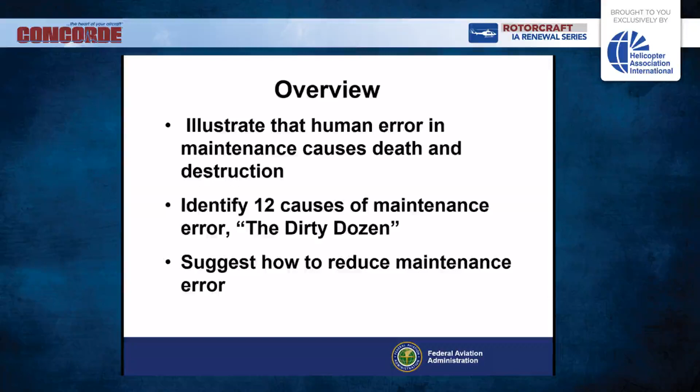This means everyone will make a mistake sooner or later. In fact, the best people often make the worst mistakes. When learning of an accident caused by human error, it's common to think the person involved is somehow deficient in skill or character, while we, on the other hand, are well-meaning, motivated, experienced technicians. We just wouldn't do something that stupid. When we think in these terms, we discount the moral of the story and miss the lesson of it.

So here's the lesson. Does the Air Force select mediocre pilots for the Thunderbird demonstration team? Not likely. They choose only the best of the best. The reason that the best people make the worst mistakes is they are assigned to the riskiest job.

The point is, you can be the sharpest person on your crew, but if you have a sleepless night or someone doesn't give you vital information, you might make a mistake. We're going to give you some suggested safety nets as we go through the presentation to help prevent these things from happening to you.

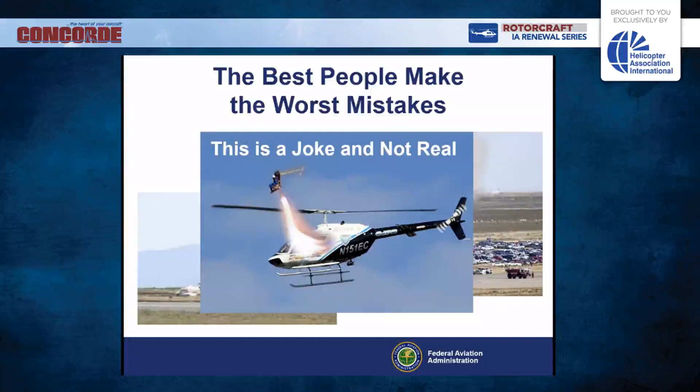Okay, we're going to go to a video here and show you about pre-flight after heavy helicopter maintenance. Welcome to this installment of the FAA's Rotorcraft Collective Series. We've been taught from day one that a safe flight is preceded by a comprehensive pre-flight inspection. Do you know where to concentrate your efforts on a pre-flight after maintenance? Let's cover a few good practices for your next pre-flight, stressing after maintenance items.

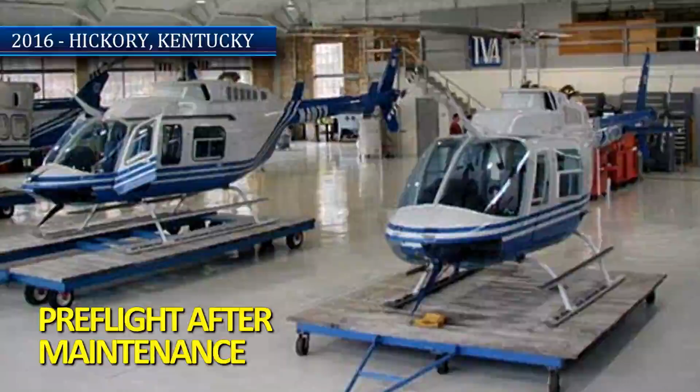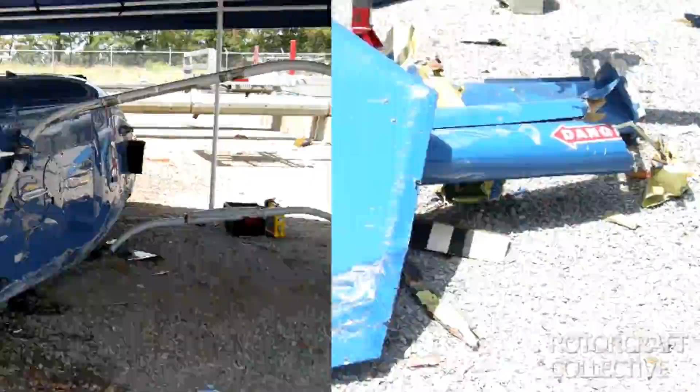Summer 2016. A pilot from the Tennessee Valley Authority was killed in a Bell 407 on a flight to Hickory, Kentucky. During a routine landing at about 75 feet, the helicopter suddenly went sideways, rolled, and hit the ground on its right side. Investigators found the collective lever disconnected from the pivot sleeve, and its attaching hardware was found in the wreckage near the main rotor hub.

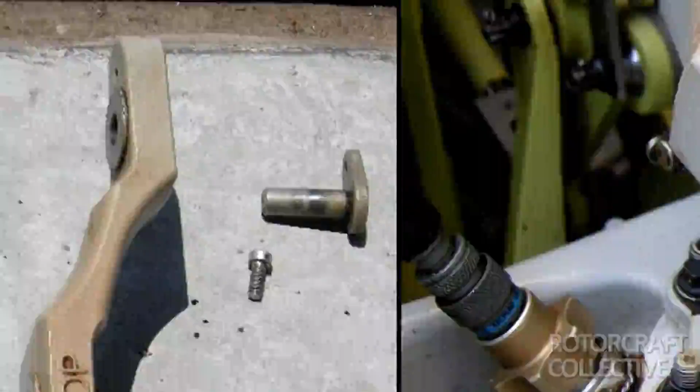The collective lever had not been safety wired, allowing the screws to work themselves out after only 38 flight hours. That's just one example of the vital importance of a solid pre-flight after maintenance or an inspection. An aircraft coming out of maintenance demands a thorough look over.

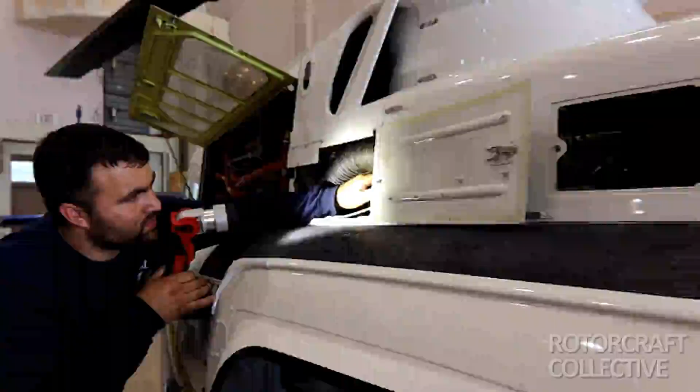Here's what we recommend you focus on. If possible, have the mechanic performing the work or a quality assurance person walk around the aircraft with you. He or she can point out things we as pilots might miss.

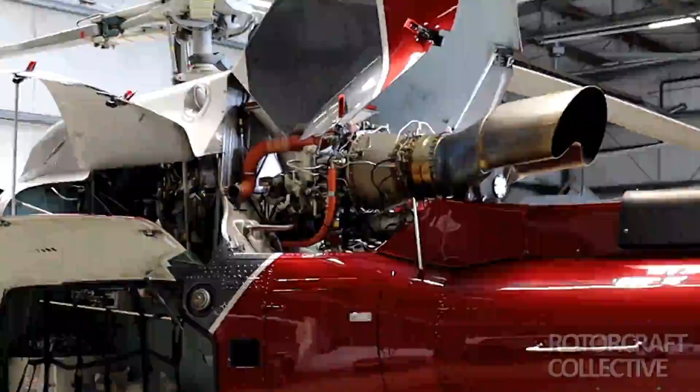Review the maintenance records, including any previous squawks, to see what work was completed and focus on those areas during your inspection. Check the aircraft for panels or cowlings that may have been opened or removed. Always remember that maintenance in one area might require work involving system elements in completely separate locations.

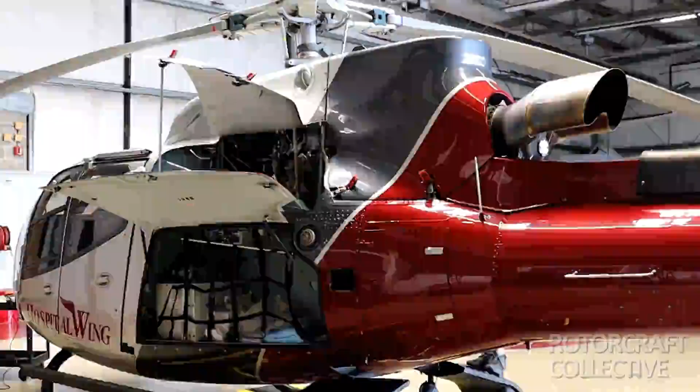Now you are ready to perform a heavy post-maintenance pre-flight. Let's look at some best practices for the pre-flight inspection.

Prepare and use a pre-flight kit, including everything necessary for a thorough inspection: flashlights, inspection mirror, the current pre-flight inspection checklist, and any other tools or materials needed to access the aircraft, including work stands or ladders. Include that pre-flight kit in your tool control program.

Perform the pre-flight with the cowlings removed so you can look at the flight controls, transmission, or other work areas that would otherwise be inaccessible.

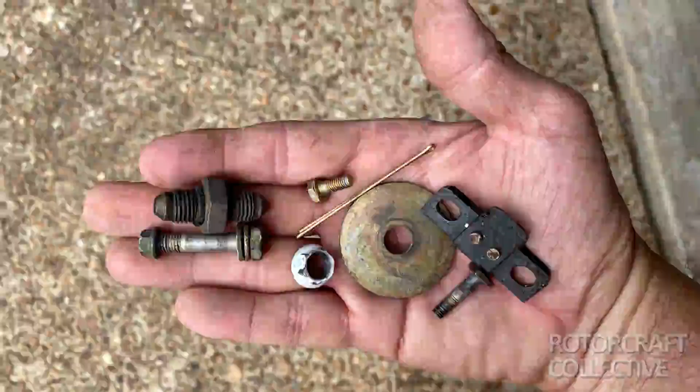Take a hard look for foreign objects like tools, pieces of safety wire, or hardware that may have been left behind. Look at bolt and screw heads with safety wire holes that may be missing safety wire. That's what destroyed the accident aircraft, and it was never caught on the subsequent pre-flights. Challenge yourself to find something wrong or out of place.

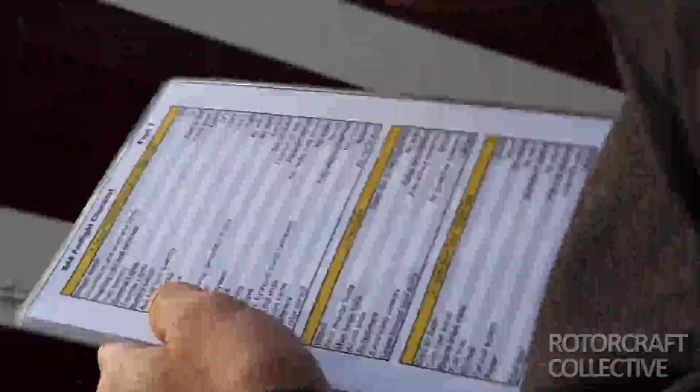Actively use a formal pre-flight checklist during inspections. Note steps completed and items of concern.

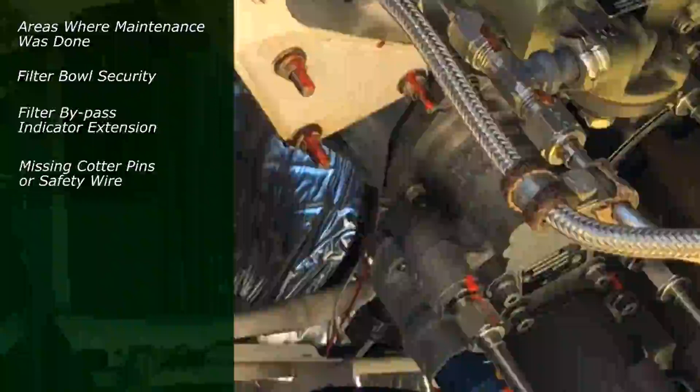Do you check the following on your heavy post-maintenance pre-flight? The areas where maintenance was done. Filter bowl security. Filter bypass indicator extension. Missing cotter pins or safety wire. Are slippage marks in place and have they slipped or cracked?

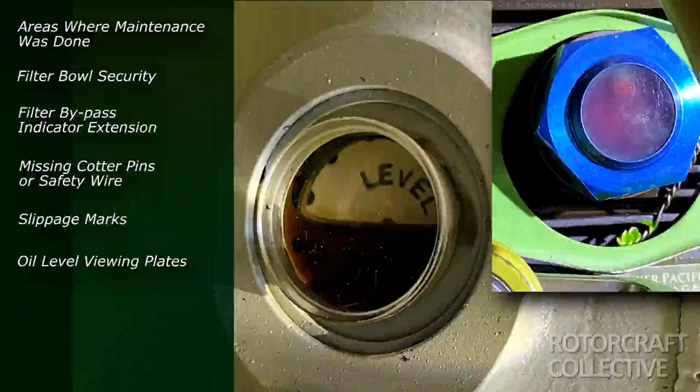Are the oil level viewing plates stained, making it look like there's oil when there really isn't any? How do the elastomeric or greasable bearings look on the main and tail rotors? How do the hanger bearings and flex plate beveled washers and hardware look?

All tie downs, covers, locking devices, and ground handling equipment must be removed and securely stowed. Perform a final pre-start rotor check by visually confirming that the main and tail rotors are untied and all panels and cargo are secured. Perform an operational check and take one last look for leaks before you commit to the flight.

It's vital to devote additional time so you can detect those subtle mistakes, like improperly installed hardware or missing safety wire. If there's any doubt about the airworthiness issue, check with your mechanic, because once you pull collective, you are committed.

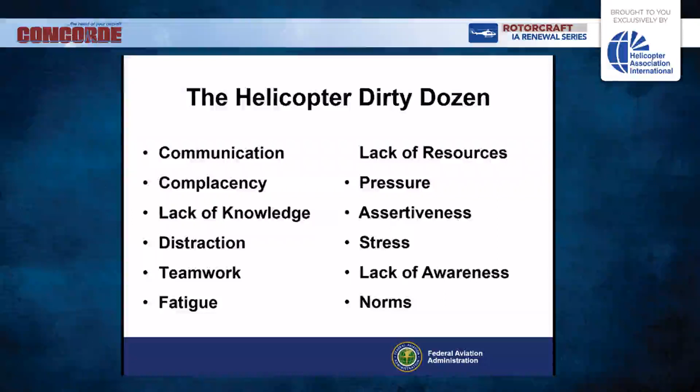This is our primary accident case study. Also, please note this accident was chosen because it hit many of the dirty dozen human factors. All of the organizations discussed are very professional, that they're trying to do good work in a safe manner.

I'm going to probably read this whole slide for you just to get the gist of what happened. On July 28th, 2010 at 1:42 p.m., an Air Methods Corporation American Eurocopter AS-350B3 medical helicopter, November 509 Alpha Mike, during a VFR flight under Part 91, descended rapidly and collided with terrain in Tucson, Arizona. The aircraft was substantially damaged and consumed by a post-impact fire. The pilot and two medical crew flight members were fatally injured. The repositioning flight for engine coking maintenance originated at the Marana Regional Airport in Tucson at 1:32 p.m., and the intended destination was the Air Methods base in Douglas, Arizona.

Oops, sorry about that. Let's get it right here. Went a little fast there. I apologize.

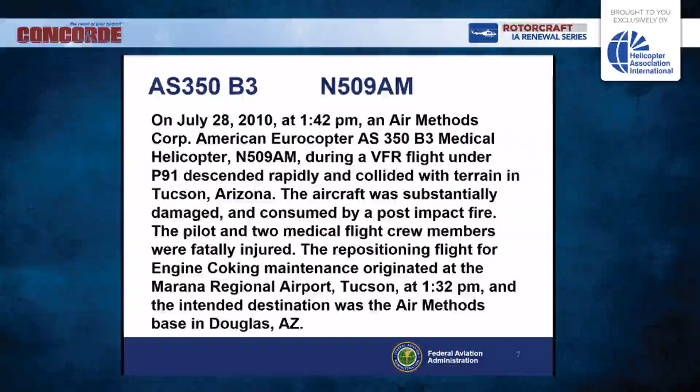Okay, this is what the aircraft looked like before the event, or the accident event.

And just to let you know, I did work for Air Methods. They're, like I mentioned earlier, a very professional organization. I worked for them probably for about 7 years as a relief mechanic. Really enjoyed working on the A-Stars back then. It was a lot of fun.

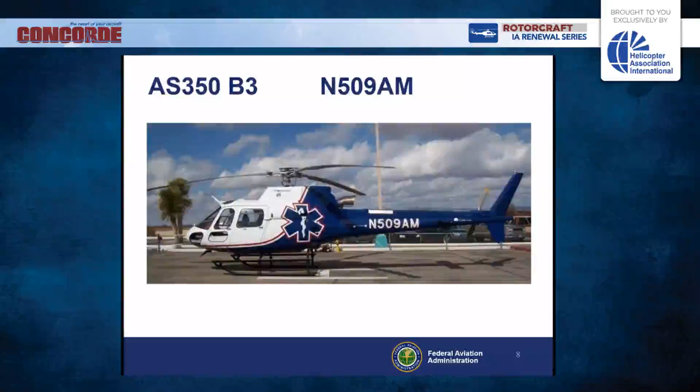All right, lack of communication is the first of the dirty dozen we'll cover. As you can see at the top are the 12 of the dirty dozen, and below you see safety nets. Communication safety nets are: use logbooks, worksheets, communicate, and remove doubt.

Shift turnover should not only be written, but descriptive words should be used, such as left, right, top, bottom, and upper. Discuss the work that was done or what has to be completed. Make sure the person responsible for returning the aircraft to service knows the status of the aircraft. Never assume anything.

Again, this is the format of the posters that were created by Transport Canada and DuPont.

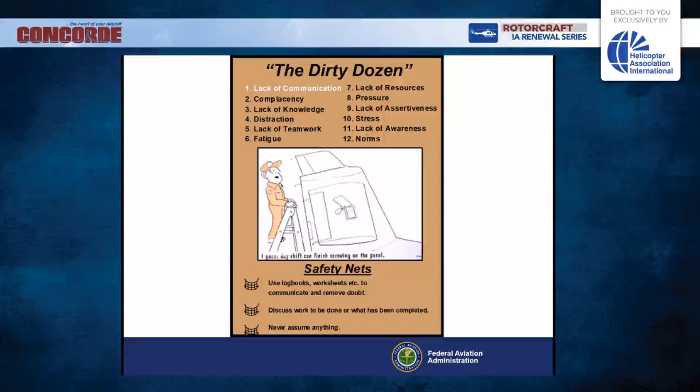So the first one we're going to cover, of course, is lack of communication, and we're actually going to cover the FAA inspectors and the repair station.

In 1953, the Civil Aeronautics Board, which was the precursor of the FAA, revised the civil air regulations to require each operator to apply for OPSPECs at the time of application for an air carrier certificate. Air carriers that existed at the time were issued OPSPECs to be used instead of competency or temporary letters.

The OPSPECs provided an effective method for establishing safety standards that address a wide range of variables. In addition, OPSPECs can be adapted to specific certificate holders' or operators' class and size of aircraft, and type and kinds of operation.

Okay, we're going to review the slide and discuss the dirty dozen, lack of communication. So you might ask yourself, what does an OPSPECs look like? We're going to show you here in a second.

As we mentioned in the first bullet, the principal maintenance inspector stated he removed the work-away-from-station authorization in 2008. When they interviewed the owner of the repair station, he stated he did not identify the change when signing page A004 of the OPSPECs.

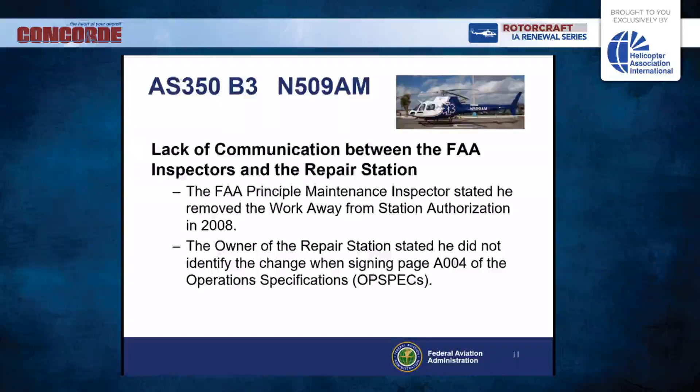So there was an OPSPECs in place that said they should not be doing any type of heavy maintenance. I would definitely consider removing the engine and disassembling and reassembling it a major operation, in my opinion.

Okay, next up, same accident. We're going to stay on that one. Complacency. We're going to cover complacency, and you see below the safety nets.

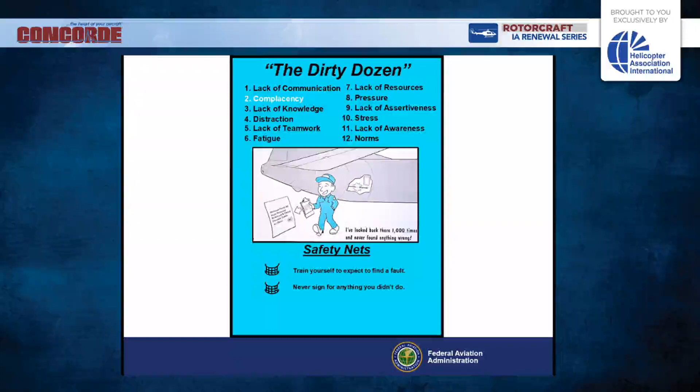Okay, the Turbomeca Service Center, Helicopter Services of Nevada, provided level 1, 2, and 3 maintenance, service, parts, and tools. The Turbomeca Service Center technicians complete a Turbomeca design checklist and engine build form when performing field maintenance. Turbomeca does not require its outside service centers to document their work with these forms, and they are allowed to develop their own forms to document it.

Helicopter Services in Nevada had developed their own work order forms and checklists that were completed when work items were accomplished. When they interviewed the HSN, the Helicopter Services of Nevada mechanic, he reported that when an in-house inspection is performed, meaning at their repair station, the work order package form as well as a final inspection are completed.

He reported that when mechanics are working in the field, they do not complete the 8130-3 form, nor do the thorough inspections and paperwork that occur when engines come into the repair station, due to the specific nature of the field work items. This means he was the only person to look at his detailed level 3 maintenance and did not ask for help from the other nearby mechanics.

And of course, the bullets just rehash what I went over. That could be considered complacency.

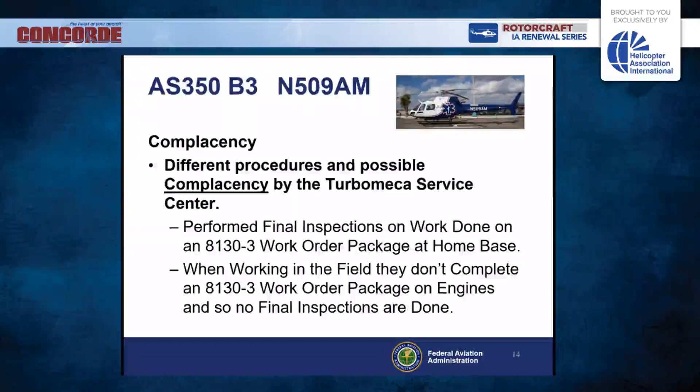Here are those safety nets for complacency. Face reality. The reality we face in our industry is mistakes, even slight ones, may kill someone. Physical fitness is important. Create challenges for yourself. Never sign for anything you didn't do.

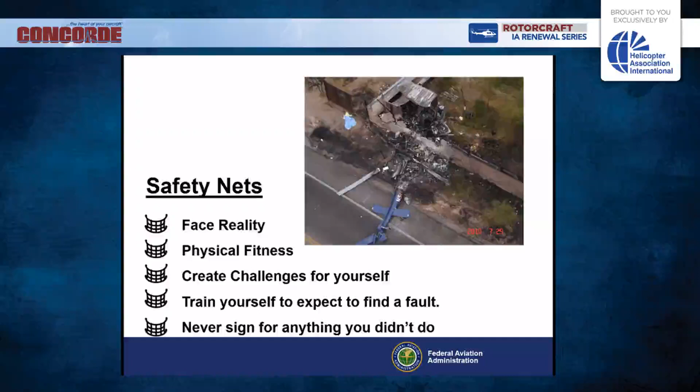All right, next up on the Dirty Dozen is lack of knowledge. It may seem that lack of knowledge is about being inexperienced. However, the rational point of view is that aviation is incredibly complex. No one has all the answers. We all lack knowledge in tasks we are not familiar with. Even experienced people need to refer to up-to-date manuals and ask questions. People can be very sharp and well-meaning, but if they're untrained, bad things can happen.

I would challenge every new mechanic out there to read procedures before you let someone teach you that procedure. If they omit any of the procedures listed in the manual, make sure you go by whatever's in that manual.

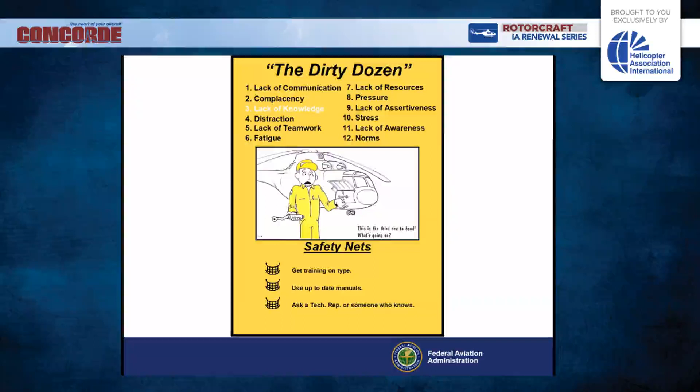So please, please always look at your manual and make sure you're doing the actual required items. Notice that the accident took place about 10 minutes after takeoff. If corrected, every one of these events could have prevented this actual event from happening. So make sure you're doing the right thing.

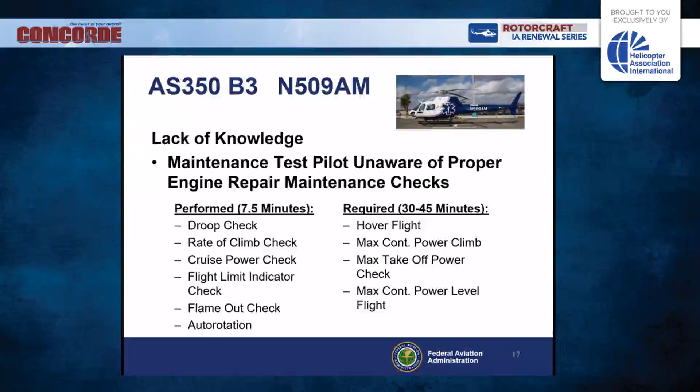Okay, lack of knowledge. Make sure you get training on type. Stay current, read your manuals, use up-to-date manuals, ask a tech rep. Those tech reps are out there to help you. You're probably listening to a lot of the tech reps actually briefing during this Concorde event. Call them up and ask them questions if you get into an area that may not be reflected in the manual, or you have a circumstance that doesn't follow the manual verbatim.

Also, make sure you communicate. No pride. Communicate with this one is get help from someone else. This test pilot could have gone to another test pilot, which we don't really have a lot of in the civilian world. It's maintenance check pilot. They end up having to do it all. So go into that manual, look up the information, and call another very experienced test pilot.

Okay, the next item on the Dirty Dozen is distraction, and their safety nets are listed below. Does anyone have a cell phone? It's almost become a feature of our culture. Whether we're driving, listening to a speaker, or maintaining an aircraft, in some cases it can be disastrous. Our jobs and lives are full of distractions.

Distractions will shift your focus from the job at hand and increase the potential for a prospective memory or place losing error. Distractions come in many forms, such as noises, bright lights, people, radio messages, telephone calls, horseplay, and problems at home.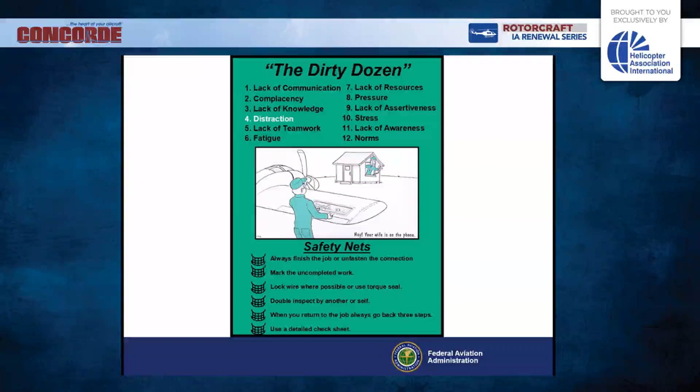This next event is about a pilot, but it could happen to a mechanic also, where they get distracted by that phone.

The pilot was conducting a return cross-country business flight in a helicopter, and the weather was good, visibility was at least 10 miles. The last 5 minutes of the flight, the helicopter's GPS altitude varied between 6,200 and 6,456 feet. The terrain in the accident area was between 6,000 and 6,400 feet. The impact point was at 6,330 feet.

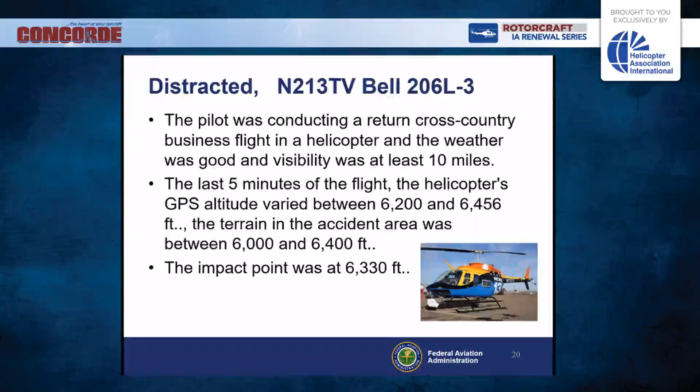Anybody want to guess what he was doing? Well, during the investigation, we found out. The NTSB and the FAA located the pilot's cell phone and his records, and it revealed that at 4:12, he called a rental car agency. Now, when they interviewed the rental car agency, the employee stated she could not tell that he was in a helicopter, but he did seem busy or distracted, and that she was mid-sentence when the line was disconnected.

Well, as you can see by this formula, the pilot was likely using his cell phone during a low altitude flight and became distracted, which resulted in controlled flight into terrain. So a helicopter plus a cell phone adds up to this exact accident picture, which is what happened to this aircraft. And as you can see by the field out there, there was nothing around except for a big open field and blue skies. And for him to fly this into the ground is just, don't use your cell phone flying an aircraft.

Now, what you can use is equipment that is built into the aircraft that has a supplemental type certificate. And there are a few cell phone installations that have been done with the supplemental type certificate. But that does allow you not to be fumbling around loosely with your hands, trying to hold something up to your ear while you've got your hands on the controls.

One thing to think about too is every helicopter has 3 controls. They've got to operate the collective with one hand, the cyclic with one hand, and then the other, they're using their feet to operate the tail rotor pedals. How can you do all that and operate a phone? I have no idea. I know you put a knee pad on, and that's a good way to do it, is have something on your knee mounted that you can just click with one hand when you need to.

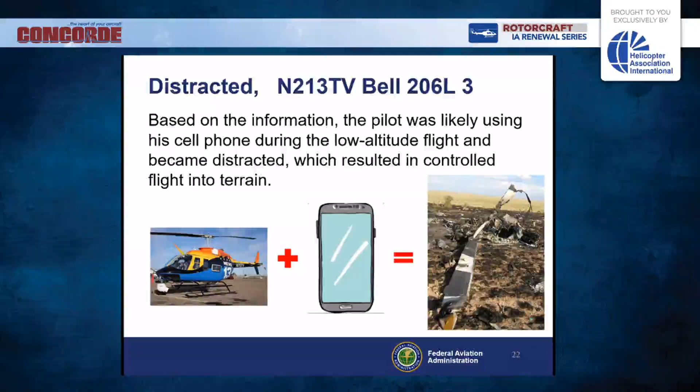Of course, the safety nets for this one is don't use cell phones during maintenance or flying. Always finish the job or unfasten the connection. Mark the uncompleted work. Lock wire where possible or use torque seal. Double inspect by another or self. Use a detailed check sheet. And when you do the job, always go back 3 steps, or when you return to the job, go back 3 steps. Very, very important.

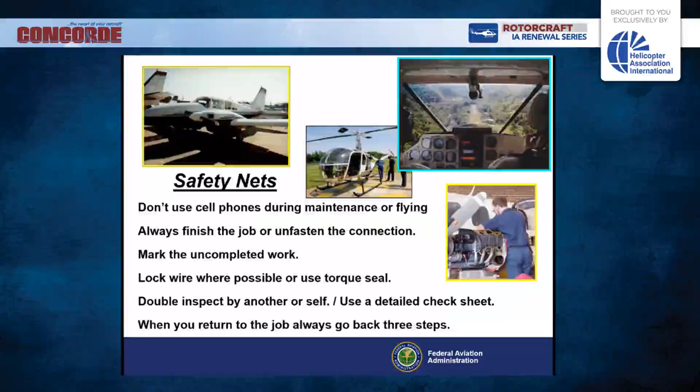Okay, the next on the dirty dozen is lack of teamwork. And as field mechanics, we're used to working alone, so the concept of teamwork can be a real change in thinking. Today, we need to rely on our coworkers, and that can include other mechanics and other pilots. More than ever, as time passes, aviation becomes more and more complex.

So make sure you pay attention to those safety nets. Reconfirm duties among team members. Team tasks require a full team. Communicate and follow those correct procedures.

Okay, this is one I am guilty of, and I would say we probably all are as mechanics. Between the dates of July 24th and July 26th, the accident engine was disassembled first. And the mechanics realized, now there were 3 mechanics. There was the repair station mechanic, and there were the 2 air methods mechanics. They realized they would need additional parts and tooling to complete the job.

The accident engine was set aside because they were already working on it, and the second engine was disassembled and the fuel manifold replaced. As the air methods mechanics completed the work on the second engine, the HSN mechanic or repair station technician replaced the fuel manifold on the accident engine.

During the work on the accident engine, Module 3 was disassembled, the fuel injection manifold replaced, the engine reassembled by the HSN technician, including the fuel inlet union. The engine was reinstalled into the helicopter by the air methods maintenance personnel. The HSN technician inspected his own work, which, as an HSN technician working away from its fixed location, he had the authority to inspect his own work.

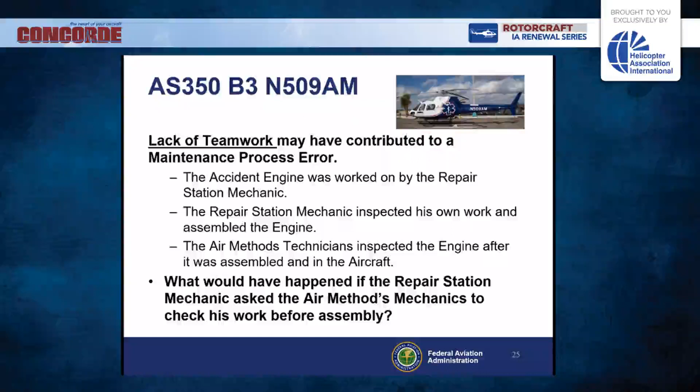All right, here are the items that were recovered, with some figures to look at. This is the as-received accident parts, displayed in the upper view of figure 1. The figure 1 is the top right picture.

The lower view shows a closer view of the area where the fuel line with jet union is attached to the diffuser assembly, with the copper gasket between. The components were intact, but reportedly found disconnected at the jet union to the diffuser connection. Note that the bolts, screws, and nut hardware were not found at the site.

The thing about this fuel ring is it delivers fuel directly into the combustion chamber through the use of a radial fuel supply, centrifugal fuel injection system.

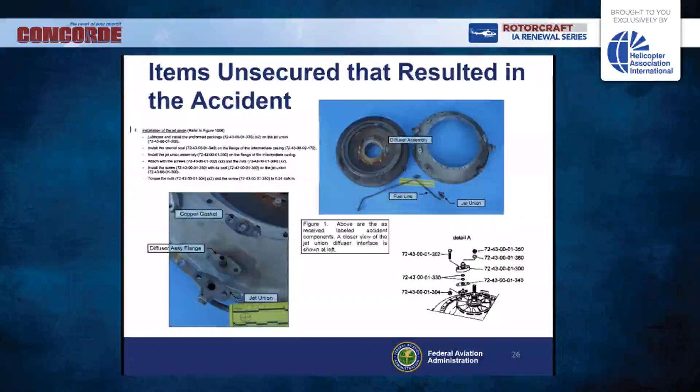Again, the bottom right corner shows all of the parts as they're assembled with everything included. And here's what the parts look like blown up.

These are considered exemplar because some of these parts were missing, but this is what they should look like when being assembled. Note there's self-locking nuts on the top. You must make sure you check to ensure they have the proper drag torque according to the manual, if by chance your maintenance manual or organization allows you to reuse self-locking nuts. If not, like in the military, we had to replace them every single time. But make sure they have that drag torque.

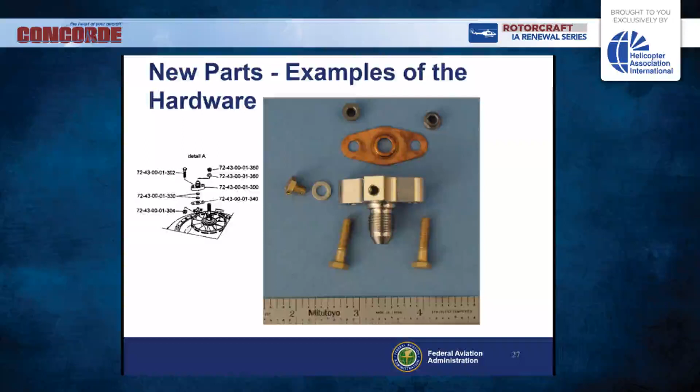Lack of teamwork. Communicate. It requires a full team. Reconfirm duties among team members and follow those correct procedures. Never assume someone else knows what is going on. Take responsibility to inform them yourself.

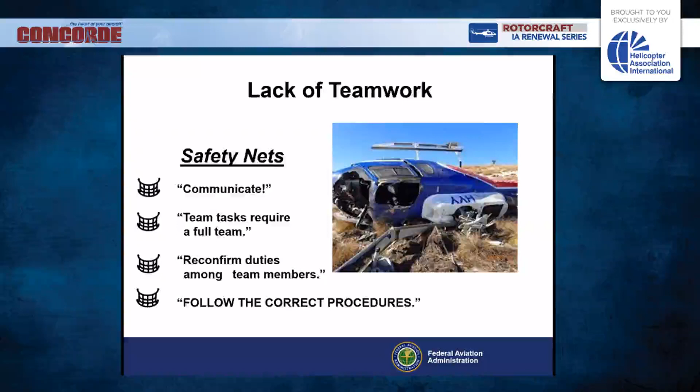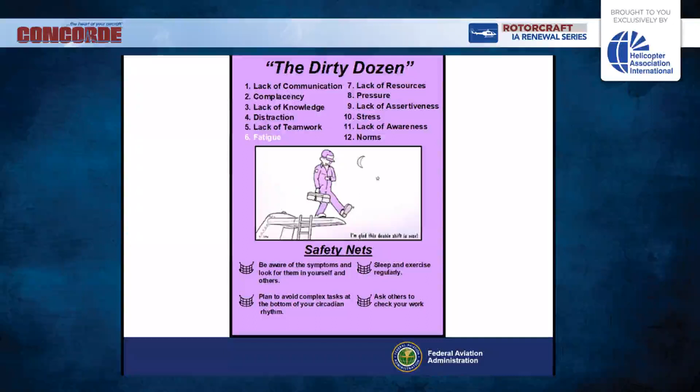Next up on the dirty dozen is fatigue. It's a constant threat to all of us. There are three types of fatigue. Acute and operational fatigue are really the same thing. They are caused by hard work and long hours. It is really only a matter of duration.

Chronic fatigue, however, is something that requires medical intervention. It is depression and needs at least counseling and possibly medication. As you can see, acute and chronic are usually a little easier to alleviate. When you get down to the operational, it's where you haven't gotten hardly any sleep in 3 to 4 days, and it takes a couple of good nights or days of sleep to recover.

So these are the symptoms of fatigue. These symptoms are true of fatigued people regardless of the category of fatigue they're experiencing.

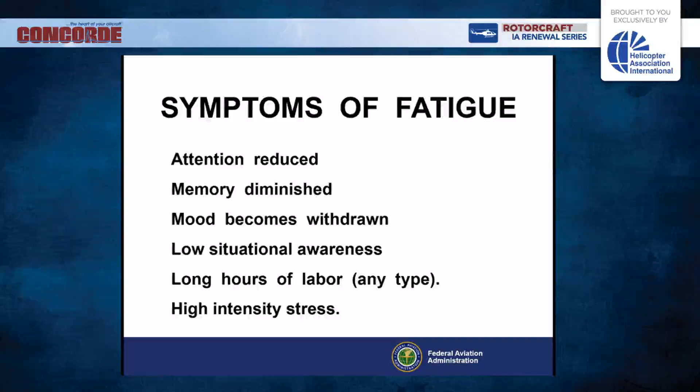This is a recommendation from another inspector, and I thought it was a good process. As you may know, mechanics do not have requirements for sleep and work hours like pilots do, which hopefully will change. But what this inspector informed me on, he explained that if you consider fatigue, you can almost compare it to a blood alcohol concentration, because you become impaired by both.

You'll notice that after 17 hours, you have a 0.05% effect on your work, which is comparable to your blood alcohol concentration. After 22 hours of no sleep, basically you're awake for 22 hours, you have a 0.08%. And after 24 hours with no sleep, you go down to a 0.10% blood alcohol concentration comparison of the fatigue.

Note, you're impaired staying awake for 17 hours in Argentina, Austria, Costa Rica, Germany, Spain, and Thailand. And you're also considered fatigued at 0.08, which is 22 hours, in the US, Brazil, Canada, Ireland, and Singapore.

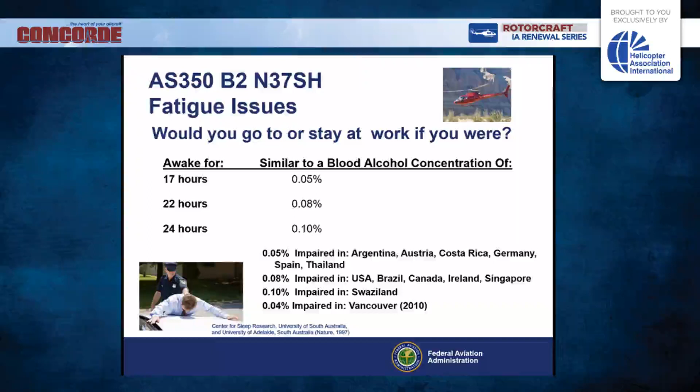Okay, now the next one we're going to cover is an accident that occurred that I'd like to go over. This is a different accident than what we covered earlier. I'm going to give you the outcome first, along with the pre-events that took place before the accident occurred and before they did the maintenance.

We mentioned these guys came in to do oddball shifts to work on an aircraft they were not originally scheduled to work on. Their shift was originally scheduled for December the 6th. Their normal hours for the mechanic would have been noon until 11 p.m., and the inspector also had the same normal hours from noon until 11 p.m. They were supposed to be off the day they came in, but instead the mechanic came in a little before 6 a.m. and worked until almost 7 p.m.

And the inspector came in around 5:30 a.m. and worked almost until 7 p.m. The mechanic claimed he only got 5 hours of sleep, and the inspector claimed he got 7 hours of sleep. Let's see what fatigue will do to people, but we're going to cover that later in the presentation.

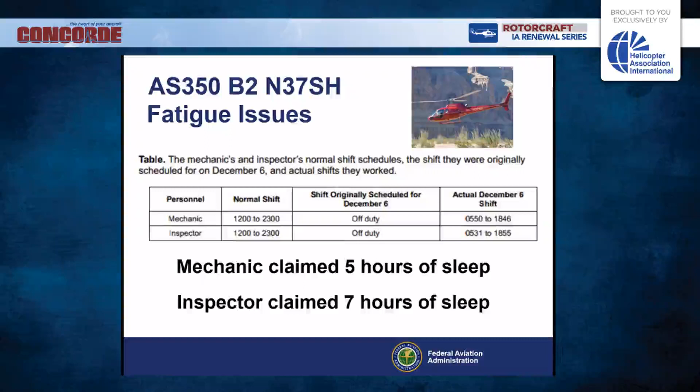We're going to go ahead and cover something that's very important to all of us, and that is your circadian rhythms. We have an internal biological clock with a cycle of roughly 24 hours. Many of your bodily functions cycle about these daily circadian rhythms, such as blood pressure, heart rate, core body temperature, and others. Perhaps most important to us are those cycles about normal circadian rhythms.

Whenever you have your typical circadian cycle, it causes performance to peak between noon and 9 in the evening, and then to fall to a minimum between 3 and 6 in the morning.

The reason they use this picture is the Marines were interested in lowering the effects of jet lag when you travel long distances. They did some attempts to do this and found out it didn't work very well unless we followed the normal things we know, like going outside in the daylight. If you traveled across the globe from the US to France, you would want to start eating and getting up at the same time they do in France. You want to go outside and get sunlight to hit your body. That will adjust your circadian rhythm, and it's not a quick process.

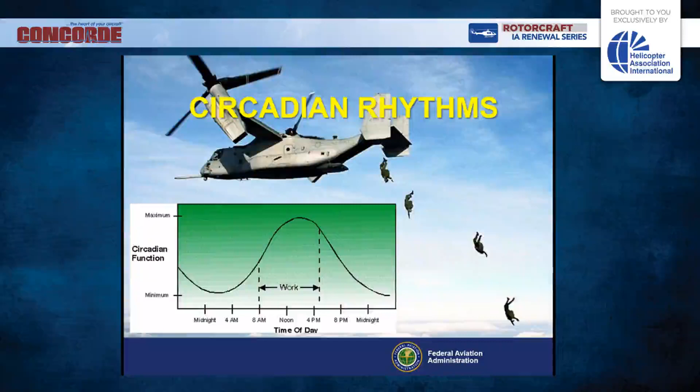Okay, here are some safety nets to prevent fatigue. Note that you can be aware of your own symptoms, and others will actually notice you having the symptoms too. Avoid those complex tasks at the bottom of your circadian rhythm. Sleep and exercise regularly, and ask others to check your work.

All right, next up is lack of resources. Parts availability is certainly important. However, to expand that topic, what would be a list of important resources? Money, parts are expensive. People, the mechanic called in sick. Time, deadlines to meet. Tools, specialized tooling we don't have, and we don't have the manuals, as in data.

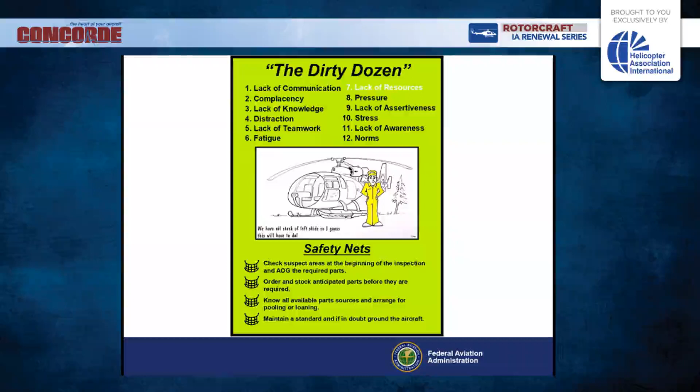All right, we're going to go back to our original accident case study and talk about lack of resources. We already read a little of this, so you'll remember it from earlier. Lack of resources may have contributed to a maintenance process error. In the beginning, when I read this, the engine was disassembled and the mechanics realized they didn't have the parts or the tooling to complete the work. So that aircraft engine was set aside and another aircraft engine was worked on by the Air Methods mechanics.

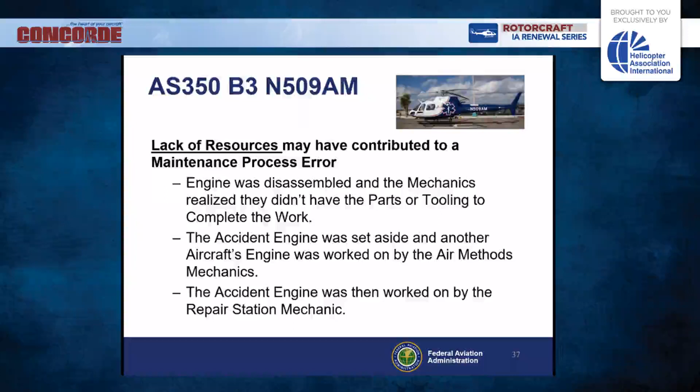Then the accident engine was worked on by the repair station mechanic. If those parts and resources would have been in place, could all three of them have worked together to do both jobs? Yes, more than likely. And of course, that lack of resources led to a maintenance process mistake. The repair station mechanic inspected his own work and assembled the engine. The Air Methods technician inspected the engine after it was assembled and in the aircraft. What would have happened if they'd had the correct resources?

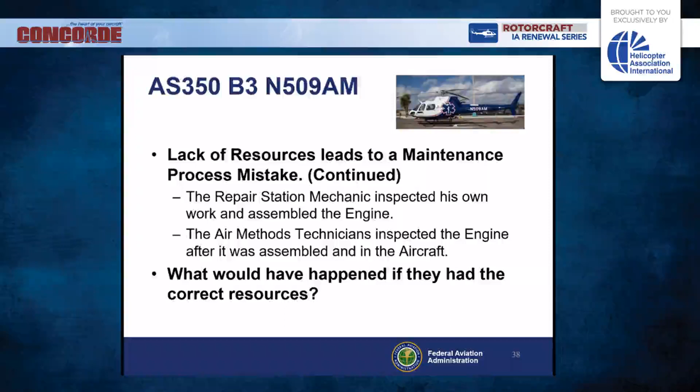Okay, here are some safety nets to help prevent that lack of resources. Check suspect areas at the beginning of the inspection, and AOG the required parts. Order and stock anticipated parts before they're required. AOG means aircraft on ground. You usually FedEx something to you or overnight it to get the parts in time to do the work.

Know all available part sources and arrange for pooling or loaning. And that includes torque wrenches. You may have to order specific torque wrenches you may not carry at your workstation, so you may have to request that be overnighted in also. And then, of course, maintain a standard, and if in doubt, ground the aircraft.

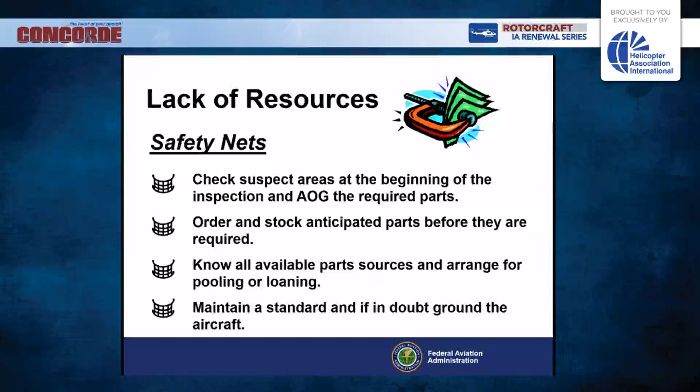Okay, the next one is pressure. Back to our original case study again. A certain amount of pressure is good, but too much pressure can cause a technician to make a mistake. If there's a generic hazard in aviation maintenance, it will be the pressure to produce. Pressure to produce causes a drift to dangerous methods.

Features of pressure to produce are completion of work despite lack of resources, supervisors condoning unapproved actions to get the aircraft underway, and releasing the aircraft with work undone.

Signs of excessive pressure to produce are being asked repeatedly, how long is this going to take? Getting frustrated and angry during the job, wanting to go home.

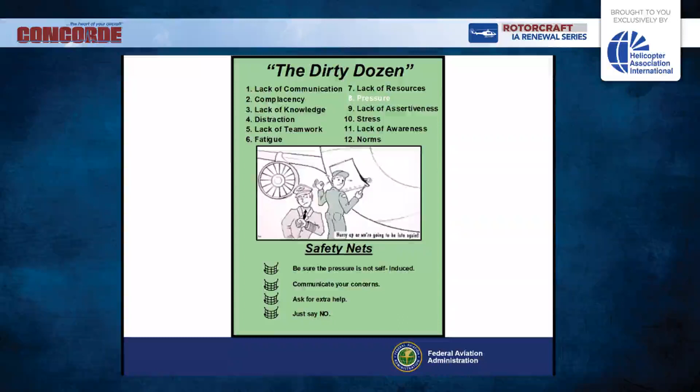I was involved with a couple of these changeovers doing heavy maintenance on the A-Star that I worked on. We would fly in the spare aircraft, swap out all the medical equipment, put it in the spare aircraft, and then fly the main aircraft to a repair location where we could do the heavy maintenance. In this case, they didn't have a backup aircraft, so there definitely was some pressure to get that aircraft operational soon.

They interviewed the Air Methods Area Aviation Manager, and he said there is some internal pressure on pilots and mechanics because they know if they're not getting enough flight volume per month, for example 10 or less, then their base may be considered for closure. All the bases in Southern Arizona area were doing okay, though, so there was some perceived pressure.

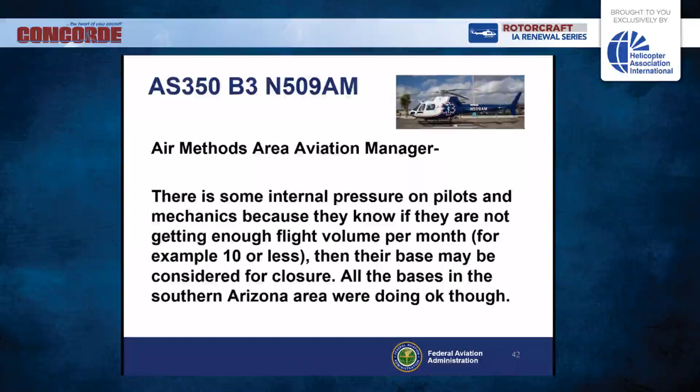All right, the next example we have is a V-22 Osprey. This example was long ago, back in 1992, right after the Osprey had come out, so this is a fairly early accident in the production of this aircraft. The V-22 was being ferried to a military base in Quantico, Virginia, when it suddenly plunged into the Potomac River while on a downwind for landing. This July 20th, 1992 crash killed all 7 crew members aboard.

The court of inquiry, which handles military investigations since the FAA does not do them, said that a fluid leak in the right engine may be attributable to the maintenance error of installing an oil seal backwards on the torque meter shaft. But the report added that it could not be conclusively determined that the reversed oil seal caused the leak. Thus, the possibility of other leak seals or sources could not be ruled out.

In addition, the report said ground testing with incorrectly installed seals did not show significant leakage, but a leak did occur on another V-22 with an incorrectly installed seal, according to government witnesses. So maintenance error could not be assigned with certainty, but is considered to be a probable cause factor.

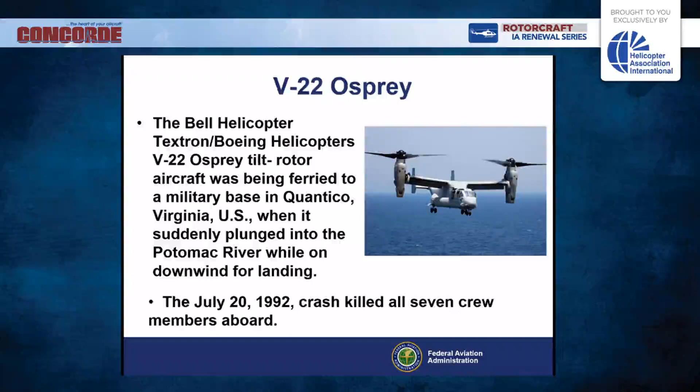As you can see, this is a layout of how these tilt rotors operate. Of course, the right engine failed. It's a very complex machine, the way that thing rotates. The whole engine nacelle rotates, making it a very complex operation. They also mentioned that another problem could have been the flammable fluid leak, which was ingested into the right engine.

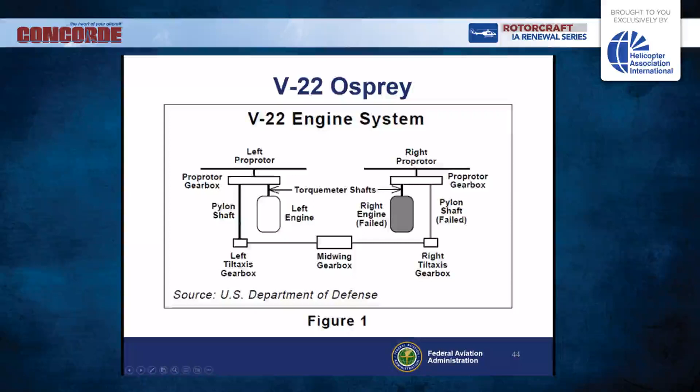And of course, they mentioned what we read earlier. They were also inappropriately downsized, inadequately supervised, and too focused on the departure of both the team and the aircraft to ensure satisfactory completion of the maintenance requirements.

Which of the dirty dozens do you think contributed to this accident? There's a bunch of them. We actually list about 5 of those: short staff, lack of supervision, pressure, didn't properly double check their work, and lack of knowledge.

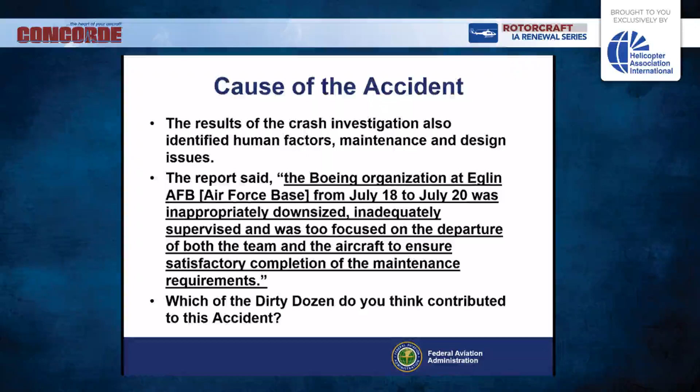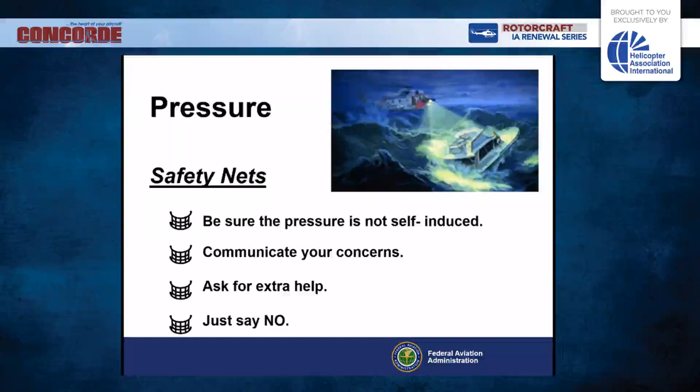Next up on the dirty dozen, again we're looking at the poster, is lack of assertiveness. Mechanics as a group, we're not as assertive as we could be. We like to fix things, we like to fix the aircraft and leave the conflict to the managers. We don't like having people in our face. Our culture is a can-do culture.

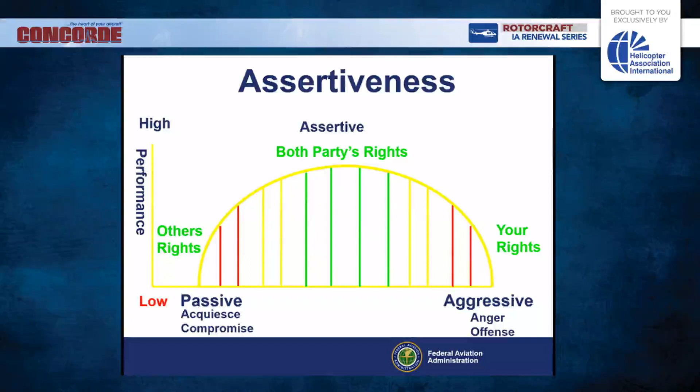Here's some safety nets for lack of assertiveness. If it's not critical, recorded in the logbook and only signed for what is serviceable, refuse to compromise your standards.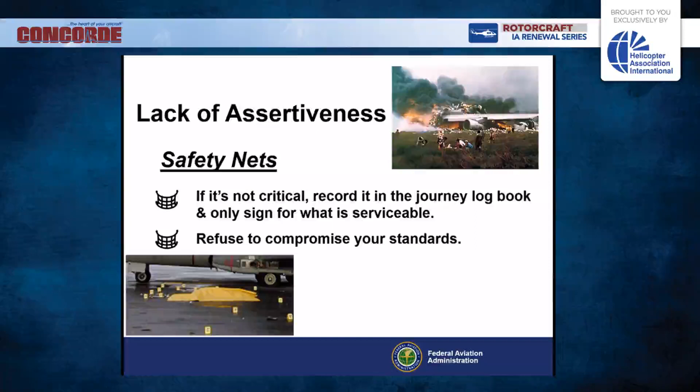Stress. Well, let's cover a little bit about stress. It's a blessing and a curse. It's a blessing in that it motivates us to perform. We experience some kind of pressure to compel us to move. It can be pleasure or pain, but it is stress of some kind. We hear that stress is bad, but a moderate amount of stress helps us to perform to our optimum level.

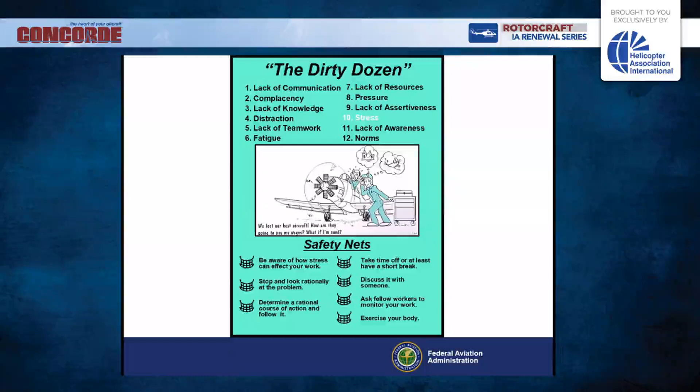So you want to make sure that you get a moderate amount of stress, but it never gets too high. You don't want to be too low. If you're too low, I always use the example of somebody sitting in their parents' basement. They don't want to go to work, they don't want to do anything, and their parents don't make them go get a job when they're adults. That is low stress, that is not good for that person. Those parents need to crack down on that young man or woman and say, look, get to work. At least give them some moderate stress, get them out there on their feet.

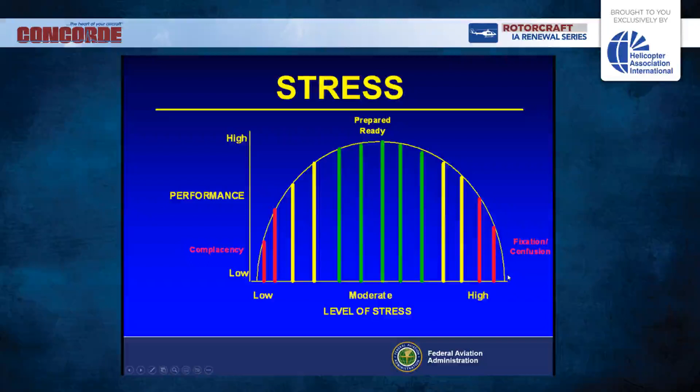Get them working. Too much stress, that's a good example of combat. When you go to combat and people are dying all around you, it really affects your mental state, and it really does create issues with thinking. That is a huge amount of stress to deal with.

Here's some safety nets that can help you get through stress. Be aware of how stress can affect your work. Slow down, stop and look rationally at the problem. This is a good example of you may be working on an aircraft engine, or you might be working in a hard to get to area. Slow down and look at the problem, and then determine a rational course of action and follow it.

If you are working in a high stress area on an engine, say you're putting in a fuel control and you're having to wiggle your arm in there and grab a nut and a bolt and try your best to hold that in place, and you keep trying to start that nut on that bolt threads and it will not start, go take a break. Take that break, or have someone do it for you. It's probably better to take that break and go back and do it, though, because you'll find out when you go back, you get it right on the threads the first try.

If you have too much stress, discuss it with someone. Ask your fellow workers to monitor your work. Exercise your body.

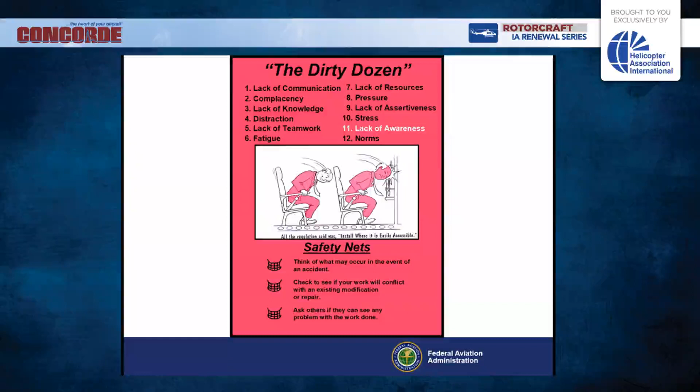Lack of awareness is our next topic. Lack of awareness or reduced situational awareness can be an indication of one or more of the other human factors issues in action, such as fatigue, distraction, or lack of communication. Here's an example of how lack of awareness can cause serious damage, going back to our original case study.

We have a few issues here on this aircraft. The NTSB mentions this first one: the aircraft operated at just below max gross weight. It had 90% of the required fuel for a 2.5-hour flight, but the flight was only 55 minutes, and that could have been a problem during auto rotation.

Anybody who's ever flown in helicopters, which I have as a crew chief, as a mechanic, and I've been in the pilot seat a couple of times in the military, you'll know that you never want to leave without a full tank of fuel, because helicopters are just not like airplanes. They don't go as far on as much fuel as an airplane does, because you're beating the air into submission. But the NTSB said if they would have left with less fuel, it could have helped them in auto rotation.

Also, they went and looked at the manuals and maintenance logbooks and found out they were operating past the cycles on one of the ADs. AD 2009-09-03 required an engine inspection at 500 cycles, but the engine had accrued 515 cycles.

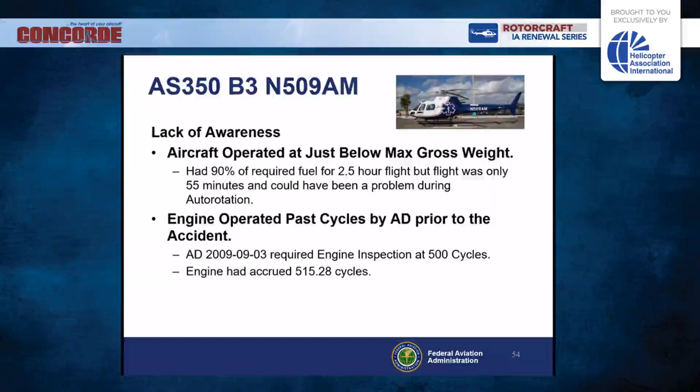To continue on the lack of awareness with this accident, the amazing thing is there were so many items that weren't correct that could have prevented the accident. Here's one of those oddball ones: the rotor RPM gauge location.

Now, when any air medical company takes over a standard helicopter, they convert it into a medical helicopter. They move the instruments around, and usually they get a supplemental type certificate to do that. But this particular item had never had a 337 done, which allows you to make a modification, and if there was an STC, it wasn't annotated. It was located in a non-standard location per the manufacturer, in the lowest left portion of the instrument panel.

And then, of course, when they looked for the records, there was no documentation showing the relocation of the actual instrument.

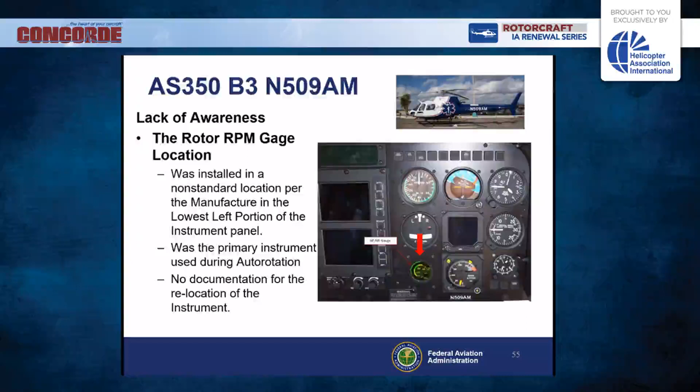This is lack of awareness. This is the safety nets form. Think of what may occur in the event of an accident. Check to see if your work will conflict with an existing modification or repair. Ask others if they see any problem with the work done.

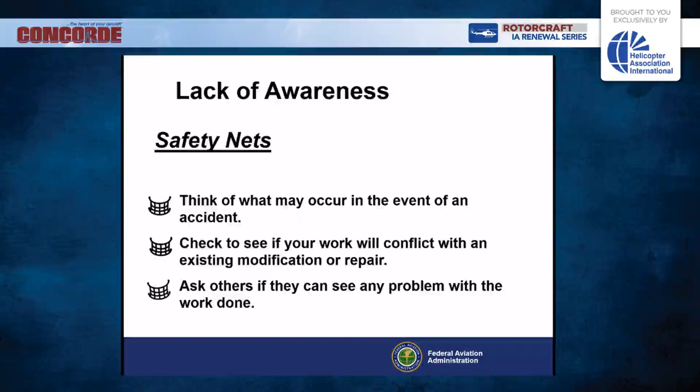And last but not least, norms. Now, in the context of the Dirty Dozen, our group has a better way to do this job than the published procedure. So when you say norms, we call it tribal knowledge - it means we at the maintenance group or organization know a better way to do it than the manual reflects. Tribal memory is a great example, and unwritten rules enforced by the group, peer pressure, or habit.

In the case that follows, someone decided to reuse a castellated nut that was worn out, and it would not have come loose if they had installed the cotter pin.

If you go to the Merriam-Webster online dictionary, it defines norms as an authoritative standard, a principle of right action binding upon the members of a group and serving to guide, control, regulate proper and acceptable behavior. It has some other definitions too, but I think that first one covers what we're talking about.

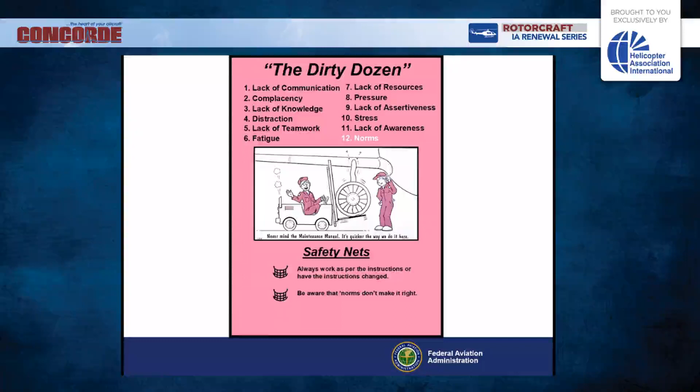Okay, this is the new accident study, the one where we were talking about the mechanics and inspectors' sleep deprivation, or working an odd shift when they weren't normally used to it. Here's the question for this AS350B2: were norms in play? A series of maintenance errors were responsible for the December 7th, 2011 crash of a Sundance Helicopters Eurocopter AS350B2 in the mountains east of Las Vegas, the U.S. National Transportation Safety Board says.

Let's go back, and I want to catch a little bit of this maintenance information so we don't miss it. The pilot and all 4 passengers on the Twilight tour or sightseeing flight were killed in the crash, and the helicopter was destroyed. At an NTSB meeting convened to review the accident, Chairman Deborah Hersman noted that research has shown that the primary category of maintenance error is failing to carry out necessary actions.

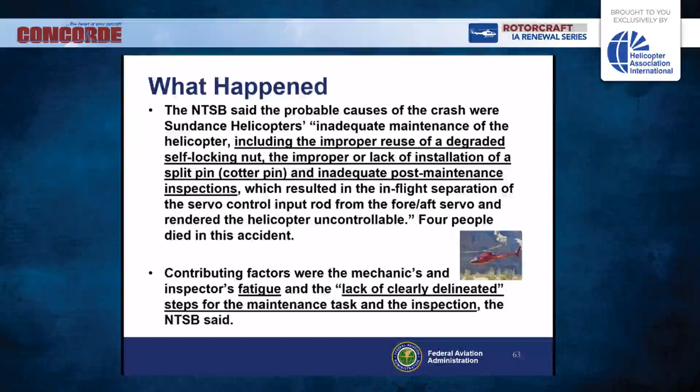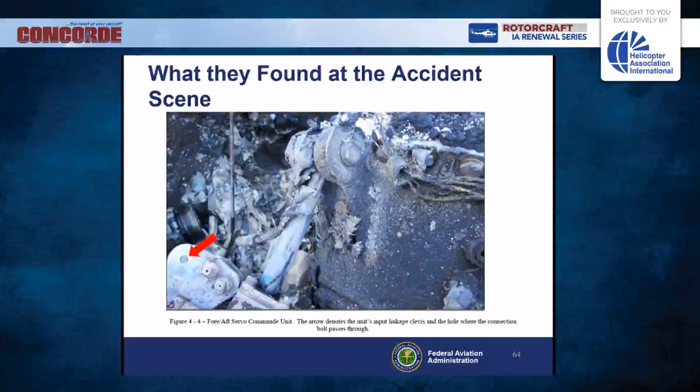Okay, norms—again, this is like tribal knowledge. Always work per the instructions or have the instruction changed, and be aware norms don't make it right.

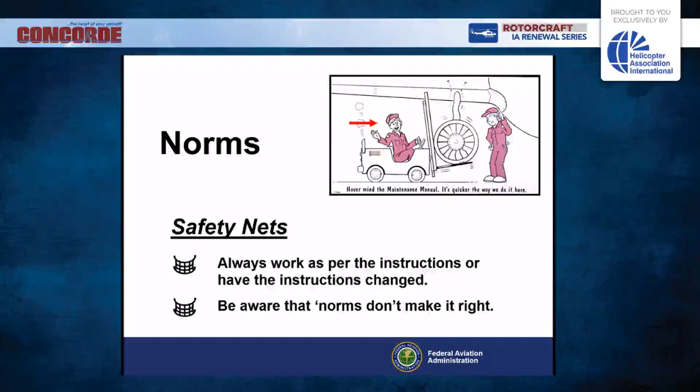I ask you to face reality, because everything that you do is very, very critical in aircraft safety. If we make a mistake, it can cost many lives. So make sure that you maintain the aircraft at the highest standards, get people to look at your work. Know you're going to make errors, but having that second set of eyes looking at it will help you. I would also say train your pilots, if you're at a remote site, to look behind you on your work.